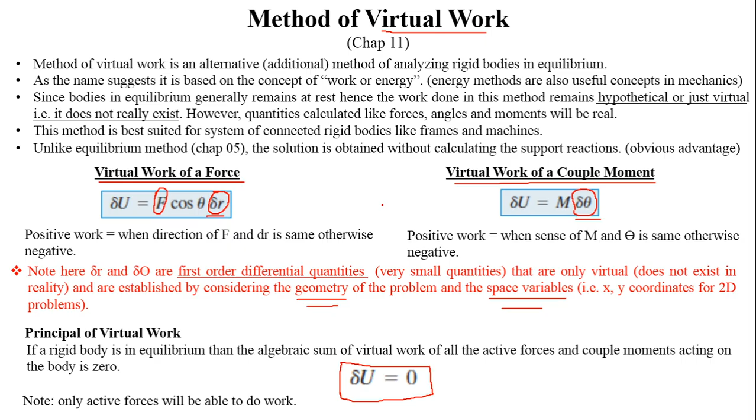It does not mean that you cannot apply the method of virtual work to equilibrium of particles or equilibrium of a single rigid body. You can apply it, but it will not be very useful in those cases. Okay, the maximum benefit of this method will be extracted when you are applying this method on analyzing frames and machines.

So let us look at this problem 11-5. It says: determine the force developed in the spring required to keep the 10-pound uniform rod AB in equilibrium when theta is 35 degrees. So at the equilibrium position, this theta is 35, and we need to find the value of the force in this spring. So this spring must be taken as an active force. Okay, we cannot avoid this force because we need to find the value of this force.

And you can also see that this spring is connected with point B, which will be allowed to displace. So when you apply this moment of 10 pound-feet on this rod AB, this point B is going to displace. Okay, just hypothetically, it is going to displace. So that is why the force associated with this point, that is the spring force, will be an active force.

Similarly, when this moment acts, it is going to rotate this rod AB about point A in the clockwise direction, and that is going to bring its center of gravity downward. So the center of gravity is also one point in this structure that is going to be displaced, and the force associated with this point is the weight of the rod AB, that is 10 pounds. Okay. And similarly, this couple moment of 10 pound-feet acting on the rod is going to alter the value of this theta by a very small tiny amount, that is delta theta. Okay, so this is also an active force.

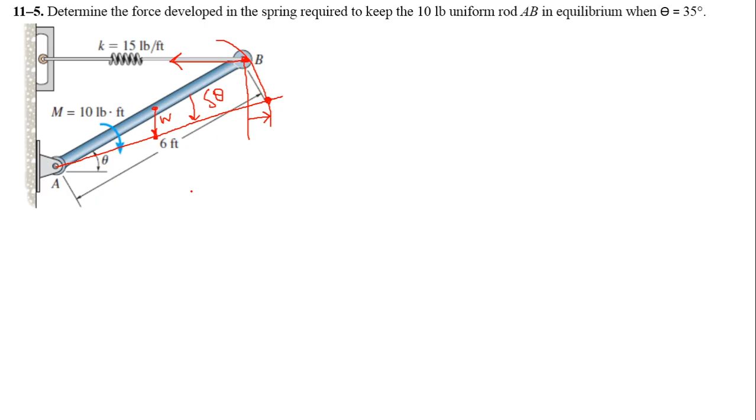So this is a picture that you should have in your mind before starting this problem. You have to look very carefully at which points will be displaced and in what manner before sketching its free body diagram. So here I have shown its free body diagram in a more elaborative manner. So at first I have identified that this point A is not moving at all. So let us take this point A as my reference point, and then I know that point G, which is the center of gravity of this rod, will be displaced, and this point B will be displaced.

So let us locate the initial position of these points by defining the space variables. So I have defined a space variable yg that is locating the initial position of the center of gravity G, and I have used a space variable xb that is locating the initial position of point B. This is the first thing that you have to do. You have to select a point that is fixed, take it as reference, and then from this reference point you locate the positions of all the points on your rigid body that are likely to be displaced under the action of the given load.

And you have shown here the reaction of the pin AX and AY, but we know that these reactions are non-active forces. Okay, so they will not participate because this point A is not moving, it is fixed. So the very small amount that this point B is displaced is basically the virtual displacement of point B, considered as delta xb, and the very small amount this center of gravity has been displaced from its initial position is considered to be the virtual displacement of the center of gravity delta yg.

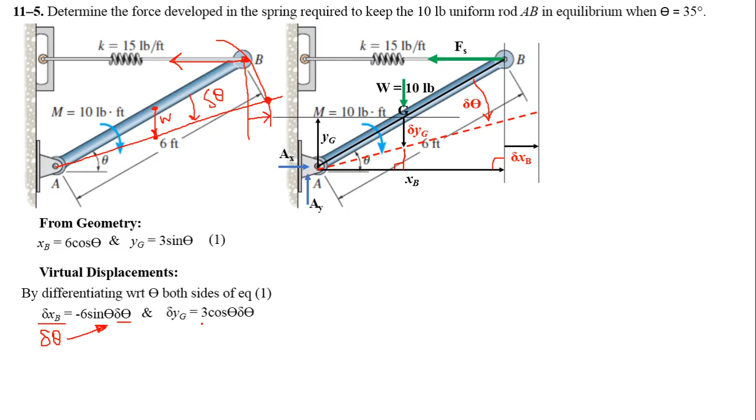Similarly, when you differentiate this expression of yg with respect to theta both the sides, you will end up writing delta yg equals 3 cos theta delta theta. The derivative of sine theta is cos of theta delta theta. Okay. So we have obtained the values of virtual displacements that are nothing but the first order derivatives of these equations that we have developed by considering the space variables and the geometry.

These are the first two steps, sorry, the first three steps. The first one is you draw the complete free body diagram. So you show all the known and unknown forces on this diagram, and you show all the appropriate displacements. Okay. The second step is to use the geometry and space variables to relate them. Okay. The third step is to calculate the virtual displacements by just differentiating these expressions. And the fourth step will be to write down the expression for virtual works.

So work done by the active loads. AX and AY will not produce any work because they are acting at a point which is not moving at all. So these go out of the consideration. This moment is trying to rotate this rod AB in the clockwise manner. Okay, and because of this, this theta changes by a very small amount, delta theta, which is also in the same direction, rotational sense, as this moment is. So therefore the virtual work done by the moment will be positive.

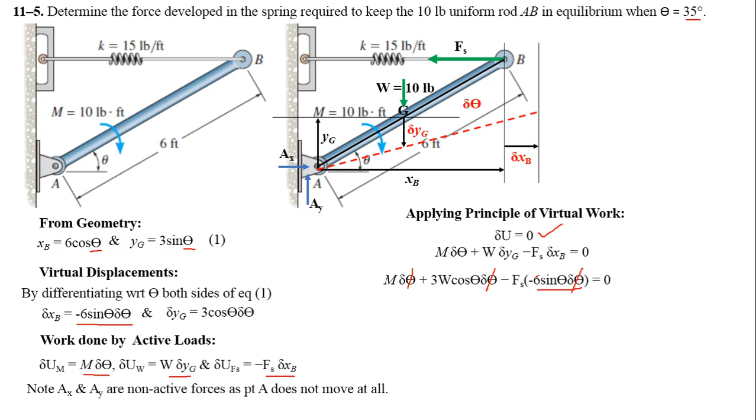Now theta is already known to me, which is 35. M is known to me, it is 10 pound feet. W is known to me, it is 10 pound. So I can easily calculate the spring force from this equation by just substituting the values. So first I make Fs my subject, and then substitute the values of moment, that was 10 pound feet, W that was 10, theta that was given to be 35 degrees, and I directly calculated the value of spring force, which is minus 10.046. So this minus actually has no significance here. It is just telling us that this direction of Fs could be towards point B. Since these are not equations of equilibrium, we should not bother about the minus sign. It is just telling us that this entire deflection can be the other way around.

So you have realized that we didn't actually utilize the values of these support reactions AX and AY, and we have calculated the value of spring force. So we cannot take this Fs as a non-active force because it is required. We want this value Fs. So please remember that all kinds of forces or moments that you are required to find out, you cannot consider them as non-active forces or loads.

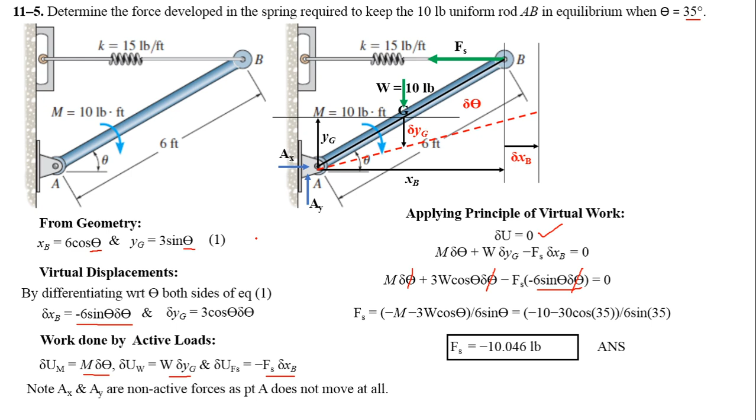So we move on to the next problem, 11-9, and it says that if a force of 100 Newton is applied to the lever arm of the toggle press, determine the clamping force developed in the block when theta equals 45. So when this theta becomes 45, we have to calculate the force that is being applied by this block to this workpiece E.

So you again have to look at this figure carefully, and you have to imagine in your mind, when this vertical force P is being applied at point A in the downward direction, how this mechanism or these links are going to deflect, because eventually you know that this is basically a machine. It's basically a machine which has interconnected members, and it is utilized in compressing this workpiece. So this member DC is basically applying a compressive load on this workpiece E. So that compressive load could be the load in the vertical direction. And this point A would move in the downward direction.

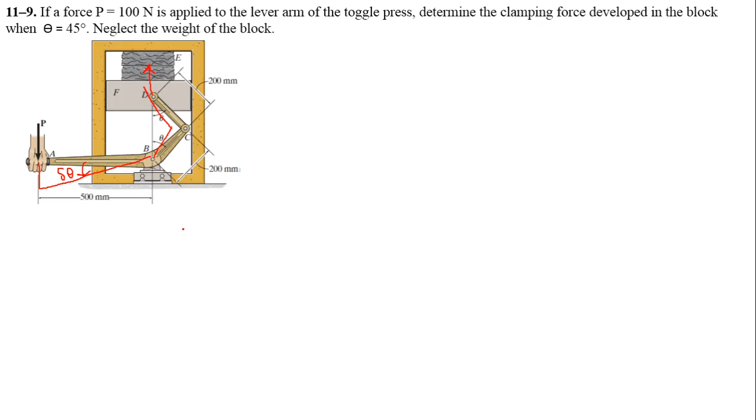So it does not matter whether you use forces at this point or at point D. Please remember that only the vertical component is important for us, because it is only the vertical component of this two force member DC that is applying compressive load on this workpiece. So let us redraw these images that we have generated in our mind so far on a clearer picture.

So you can see here that when this force P is applied at point A, it will displace point A in the downward direction by an amount delta YA, which is the virtual displacement of point A, an infinitesimally small displacement, and this lever AB will be rotated by an amount delta theta, and similarly this lever BC will be rotated by delta theta, which will cause this member DC to rotate and apply a vertical force to this workpiece E, which is the compressive force that we want to calculate.

So this point D is going to move in the upward direction as this two force member DC tries to straighten up because of this rotation delta theta, or delta YA movement downward. And you can see that point B is not moving at all. So the pin reactions Bx and By will be non-active forces. One active force is the applied force P. The other active force will be Fd. We have to calculate Fd.

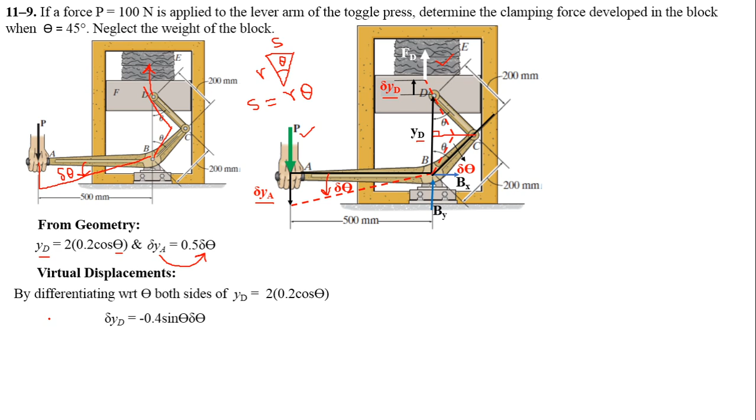Now the third part is to calculate the virtual displacements. So delta YA has already been written in terms of delta theta. This YD is 2 times 0.2 cos theta. So by differentiating the expression of YD with respect to theta, I can write down the expression for delta YD, which is minus 0.4 sine theta delta theta. Now, once you have written this expression, you again note that this virtual displacement delta YD has been represented in terms of delta theta.

As I mentioned, in this problem we have only two active forces, this applied force P and this compressive force FD that we want to calculate. So there will be two works only. This Bx and By is basically a non-active force because this point B is not moving at all, and CD is a two-force member. So only the vertical component of this two-force member is required, which is going to compress this workpiece. So that we have considered as FD.

So the work done by the force P will be positive because the direction of P and delta YA are both in the same sense. So this work is positive. The direction of FD and the virtual displacement of point D, that is delta YD, are both in the same direction. So this work will also be positive.

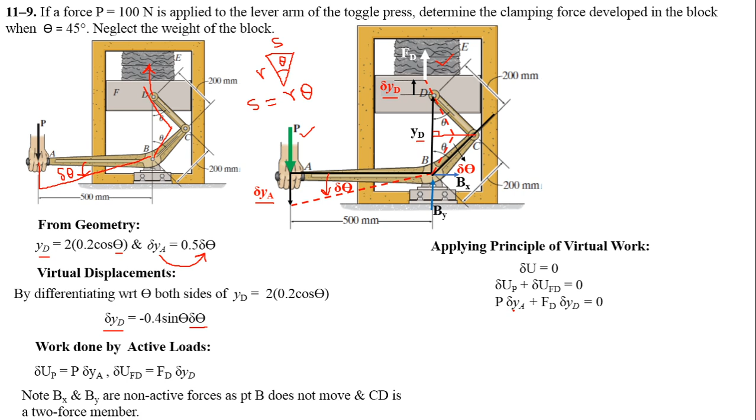Therefore, applying the principle of virtual work, we will have this equation P delta YA plus FD delta YD equals 0. And now we substitute the values of delta YA, which is 0.5 delta theta, and delta YD, which is equal to minus 0.4 sine theta delta theta, in this equation. And so we again see that this common deflection delta theta cancels out from our expression, and we are left with only these quantities which are known to us.

P is given to be 100 Newton, okay, and theta is given to be 45 degrees. So we can easily find the value of FD from this expression. Just by putting the values, we are able to find the value of FD, which is 176.77, which is equal to 177 Newton.

So after solving this problem, you might have realized that we did solve some problems on machines in chapter number 6, and there we saw that if we are to use the equations of equilibrium in analyzing machines, then we have to really dismantle different parts of that machine and analyze the equilibrium of each and every part separately, thereby making a lot of equations and then solving them simultaneously to find out the required quantities. So that method was actually lengthy. On the other hand, the concept of virtual work has actually reduced our effort.